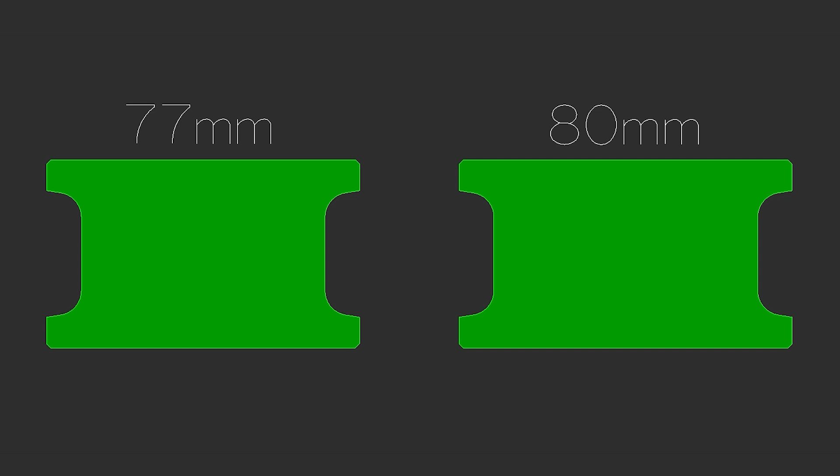Before we can program a finished return, we're going to need some important information about the tools that we'll be using. Sometimes there's multiple diameters in a profile set. We will want to choose the largest one. This eased edge set that I'll be using for this example consists of both 80mm and 77mm tools. These measurements can come from an accurate drawing or physically measuring the tools with a caliper.

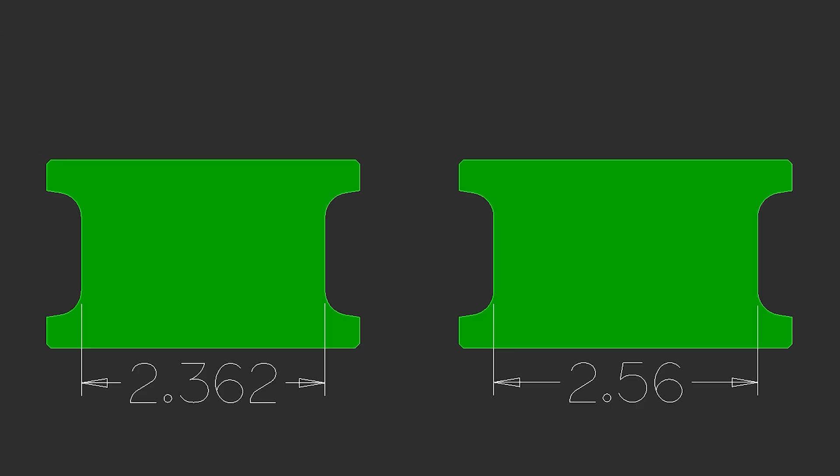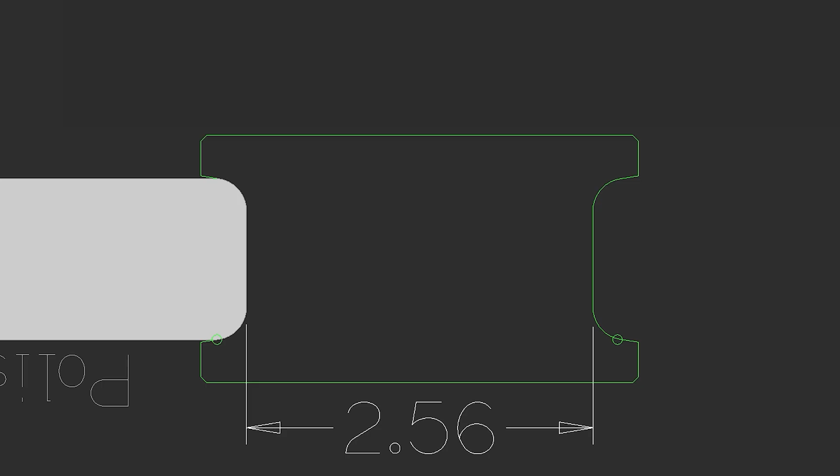The measurement that is the most important to us is the smallest diameter of the tool. So the tool on the right is the largest, so that's the one we'll work with. We'll also need the largest diameter that actually touches the stone. Sometimes we call this the ride height. If you have an accurate tool drawing with your ride height defined by the small circle, you can use this as the measurement by mirroring it over to the other side. The distance between these 2 points is the second diameter that we'll need.

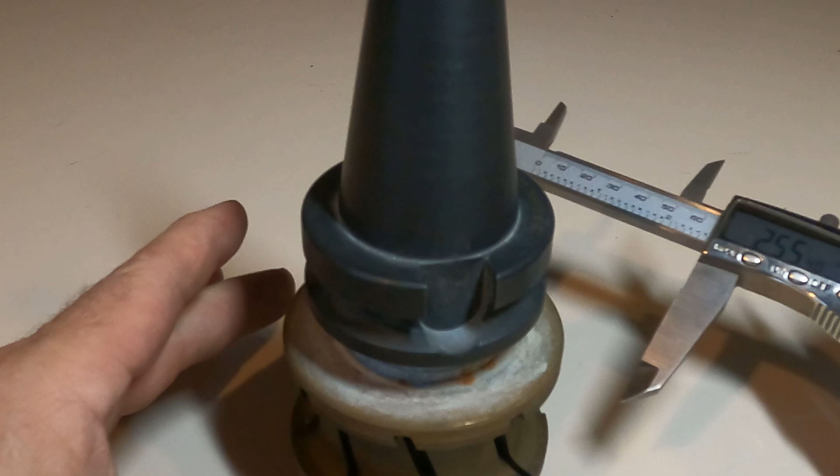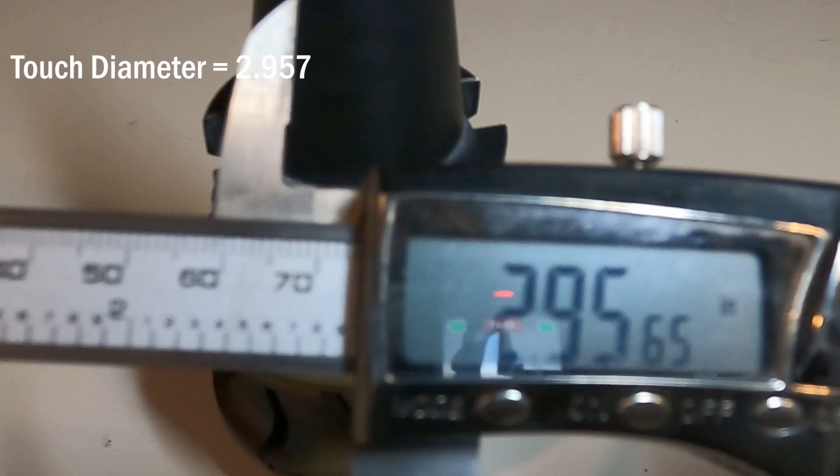We can also get these 2 diameters off of the tool itself. We can measure the small diameter of the tool, and then if the tool has been ran, we can measure from the outermost wear mark on the one side to the outermost wear mark on the other side. We'll use these 2 diameters to draw circles in AlphaCam.

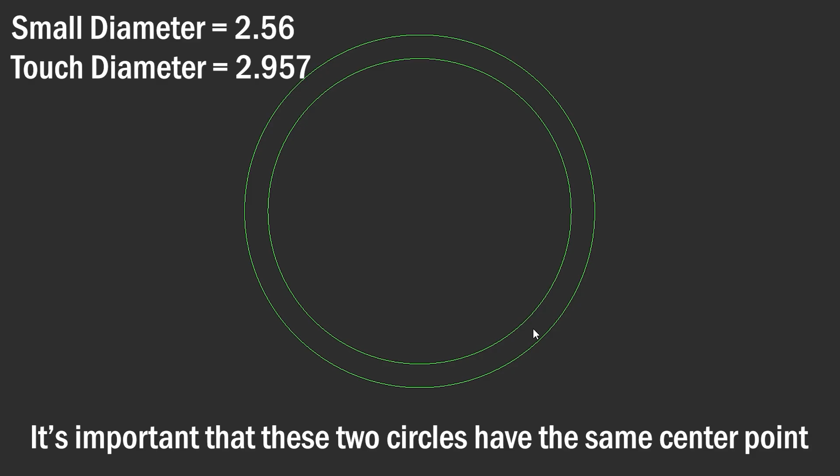So I'll choose to draw a circle, center plus diameter. One of the diameters was 2.957, and I'll make the center of it be at 0, 0. Then I'll draw the second circle, center and diameter, with a diameter of 2.56, and I'll have the center of it be at 0, 0 as well. It's important that both circles have the same center point.

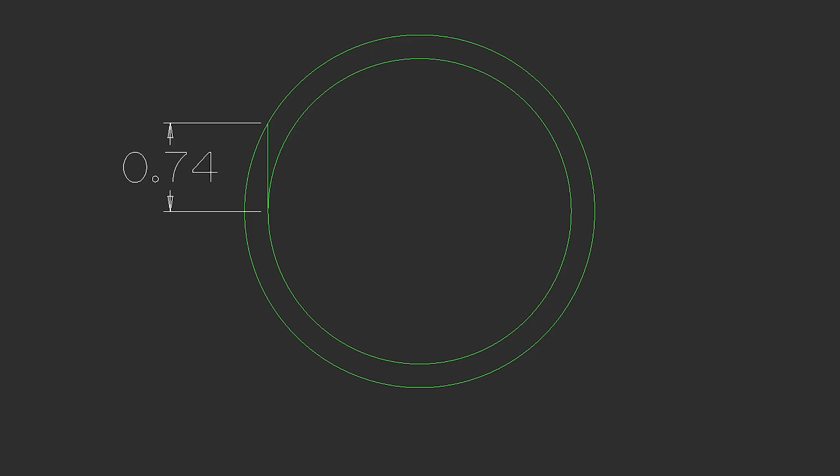Next, we'll draw a line. We'll start the line at the 9 o'clock quadrant of the smaller circle, and we'll turn on our ortho to bring it straight up and past the second circle. And then we'll trim the line against the larger circle. The length of this line is the distance that we need the center of the tool to stop early to avoid the edge of the tool going past. We'll save this number for this profile set.

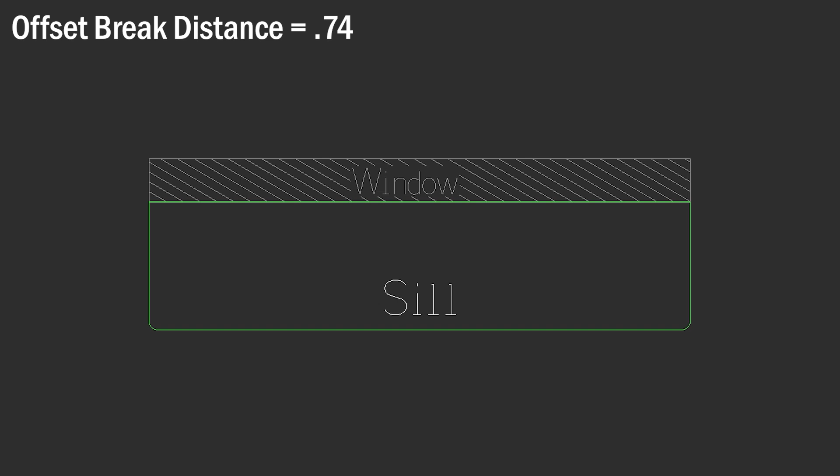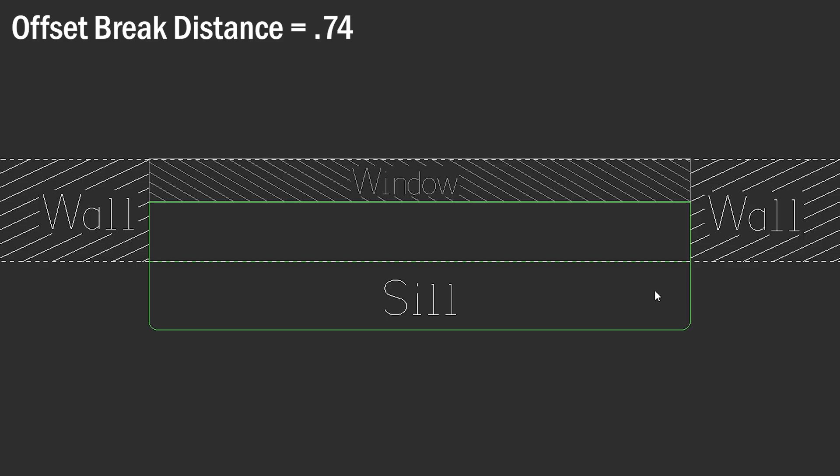And I'll use this profile set on a windowsill for this example. This windowsill would be going through a wall, and I would want my edge profile to stop before it reached the wall. So I'll draw a line at this location so I know where I want my edge profile to stop. Then I'll offset this line by my stop distance for this profile set, which was 0.74. I want to offset in this direction to shorten my cuts.

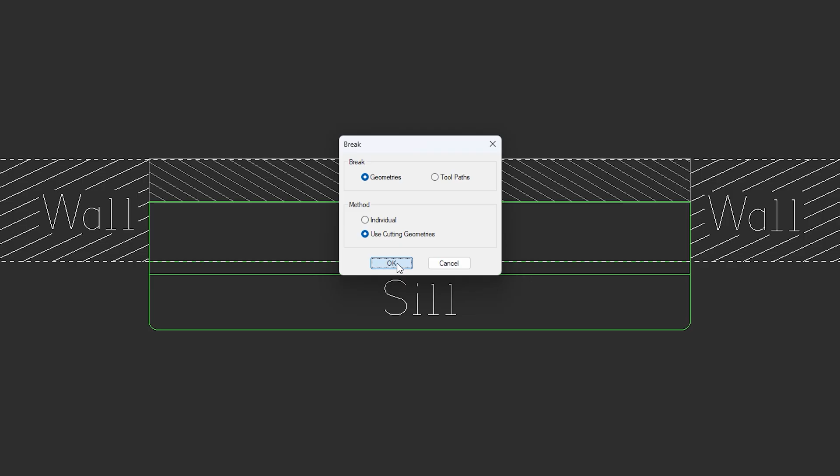I'll be using this line to break my cut profile line on both sides. When I choose break, I'll set it to geometries and using a cutting geometry. I'll select the offset line, finish, and then I'll select the profile line to be cut and finish. I'm going to turn off all my visual reference objects, and then I'm going to delete the line that represented the wall. And I won't even need my offset line because I already used it to make breaks in my cut line.

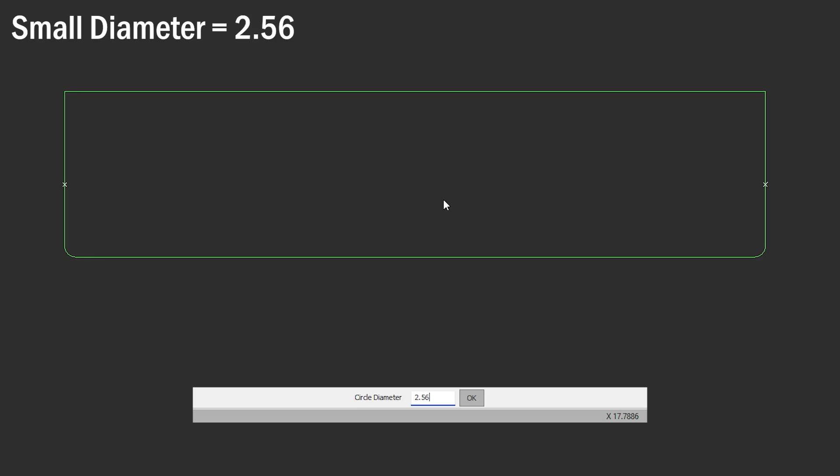Next, I'm going to draw arcs at each end of my profile cut line to control the lead in and the lead out. I'll make a circle to get my arcs. The circle that I draw will have to have a slightly larger diameter than the small diameter that I measured on my tool, which was 2.56. I'll make it slightly larger by adding 10 thousandths, plus 0.01. And then I'll just place this circle somewhere in my drawing.

Then I'll draw a horizontal and vertical line using the quadrant snap, which is my F5 key. And I'll use these lines as cutting geometries to put 4 breaks in my circle. And then when I delete my cutting geometry lines, I'm left with 4 arcs. Next, I'll move and select the appropriate arc by the correct endpoint and place it at the end of my profile line so that it will lead the tool away from my part. And I'll repeat the process for the other end of my line as well.

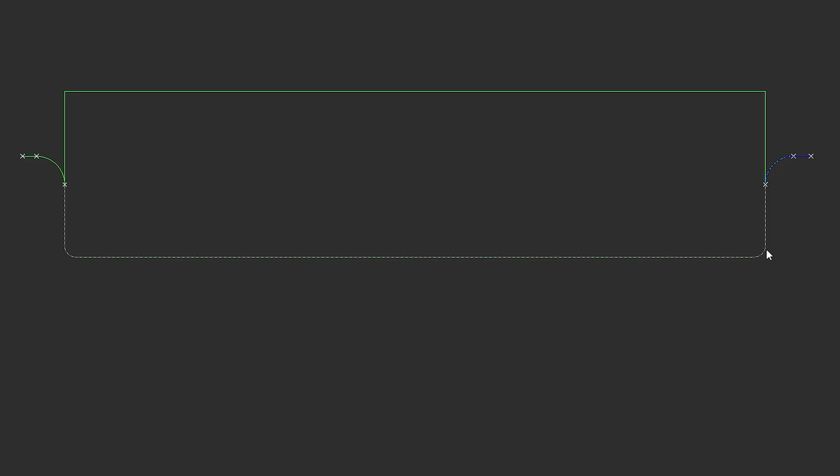We'll also need a straight line to guide the tool directly away from our part. I'm going to do this by drawing a line starting at the endpoint and turning on my ortho, the F3 key, to drag the line away from my part. And I'll repeat this on the other end as well. These segments are what I'll want the tool to follow, so I'll join them all together as one.

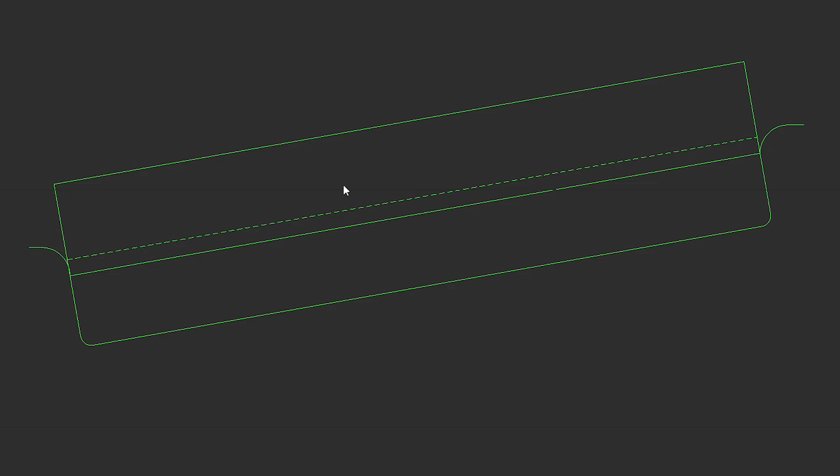This method works great if your parts are straight and square. If your part isn't straight, then this method with the lead in and outs could cause one end to dive into the material and the other end to lead out too early. So here's a second way to draw your leads. I'm going to delete all the extra geometry just to make it a little easier to see.

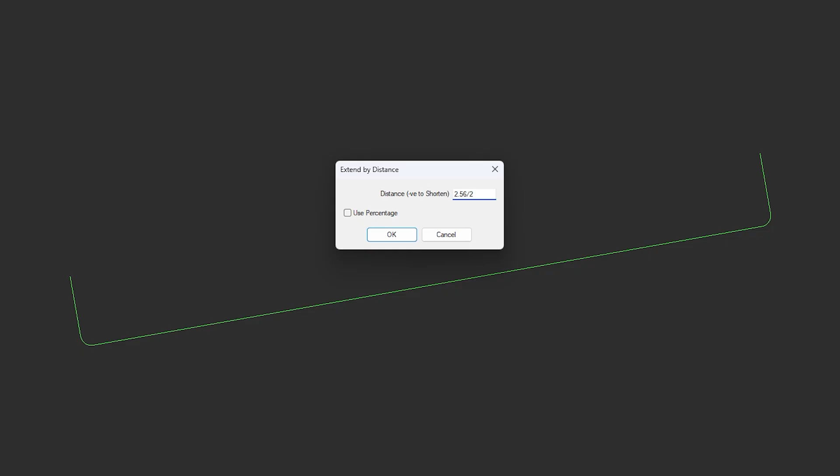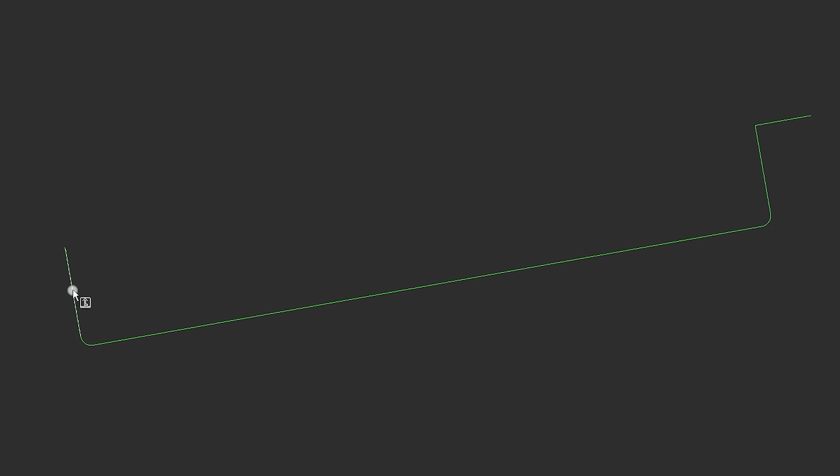We're going to have to first extend the ends of the lines by the radius of the cutter that we're using. I'll use extend by distance to do this. The small diameter of the cutter that we're using was 2.56, and I need the radius, so I'll just divide that by 2 and choose both ends of the line to extend. Next, I'll draw a line that starts at the end of and is perpendicular to the existing line. The length of this line will have to be longer than the radius of the tool, which we'll have to eyeball, but we'll be able to verify after the next step, which is fillet.

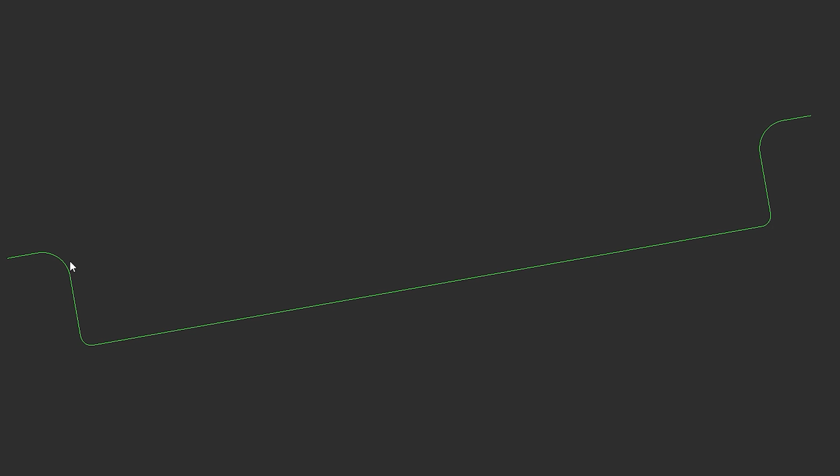And this radius will have to be slightly larger than the tool. The tool's diameter was 2.56, which we would make slightly larger, maybe 2.57. And then, since we want the radius, we'll divide it by 2. And as I apply each fillet, I can see at the ends I have a flat straight line, which tells me that the length of my line is longer than the radius of the cutter.

And no matter which method you use to create your shape, we can apply tool direction like we normally do, and also the style using that tool. And here we can see our sharp lead in and our sharp lead out, which we'll also see in simulation.